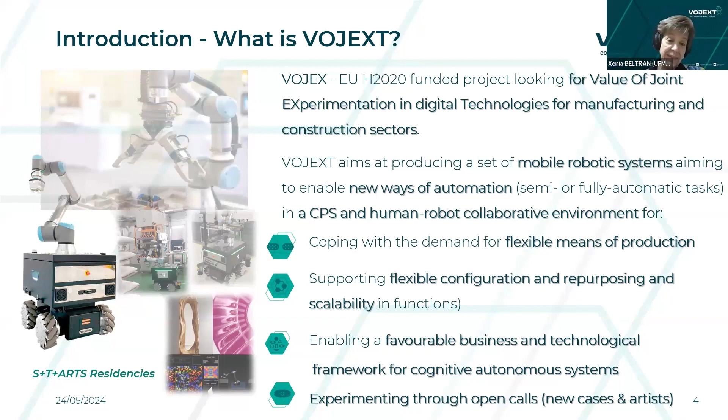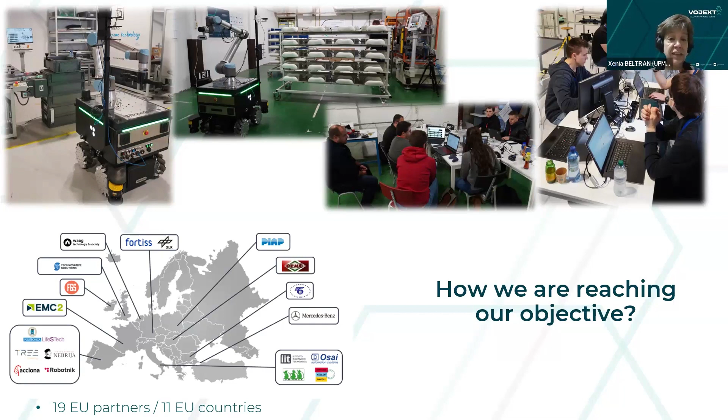From these companies we have worked together. We first studied the environments of the production, and we are working together as a team, as you can see, in the different shop floors, supporting how the robot can be integrated in the best manner for them. Next one, please.

The way we're validating all the technology we're producing - from the robot to the software through the visual components - for the different companies and organizations that are facilitating the demonstrators, is to have these 5 companies as our use cases. So we have 5 organizations of the consortium as our functional use cases, and we're working in their shop floors in the different areas. So we have one company from plastics in Hungary.

Actually, what they produce is polyurethane among some other products, but they have brought out the production of pillows and how to handle them. We have gone through challenges from this kind of sticky material to process and handle it, and to support not only how human errors can be overcome, but also how robots can collaborate with humans, because one issue they have is lack of personnel supporting their production.

The other use case we implemented is in the electronics domain, led by OSAI in Italy, an automation company. What we are doing is improving their current concept of robotics, going from fixed robotics to mobile robotics in collaborative environments, and applying it in electronics. They have different challenges, not only because their products are very small, but their idea is to have flexible means of production and see how the robot can be used in one or several machines.

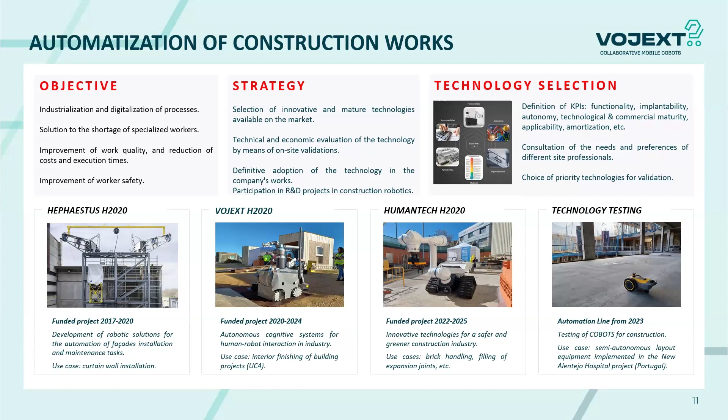We have also participated in other projects related to robotics for construction, like HEPHAESTUS, a system to install facades, and also VOJEXT, of course, and HUMANTECH with several functionalities. And the last one is one of the commercial items we are testing in our real construction sites.

Well, next please. What are the main interests of Acciona in this project, and specifically in use case 4? First of all, we think that we can take advantage through the project VOJEXT to introduce this robotic and digital technology in the works. In this way, we can optimize the quality, the cost, and the timing of these tasks, and introduce the industrial production concept in a difficult environment like a construction site.

With this, we also reduce risks and improve safety and health of the human workers, and combat a big problem with the lack of skilled workers for certain tasks. In this way, we also think that VOJEXT appeals to the new generation of workers who like to work with these advanced technologies.

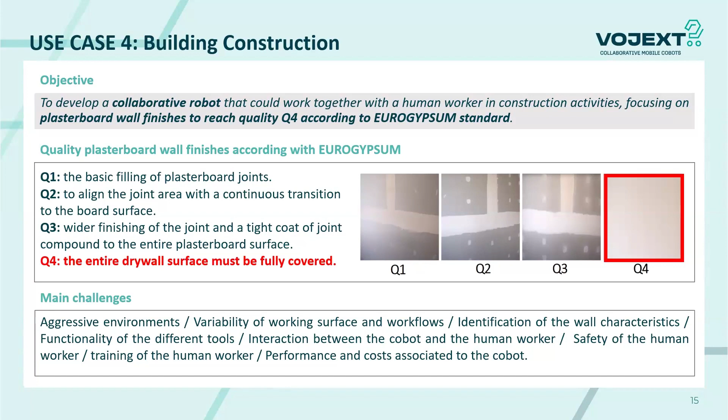Well, to do this, the workflow that will be followed in this use case consists of 3 steps. The first one is the taping of the joint between the plasterboard sheets. The second one, the spraying of the finishing paste on the wall, and the sanding of the plastered surface. With these 3 tools: the taping tool, the spraying tool, and the sanding tool.

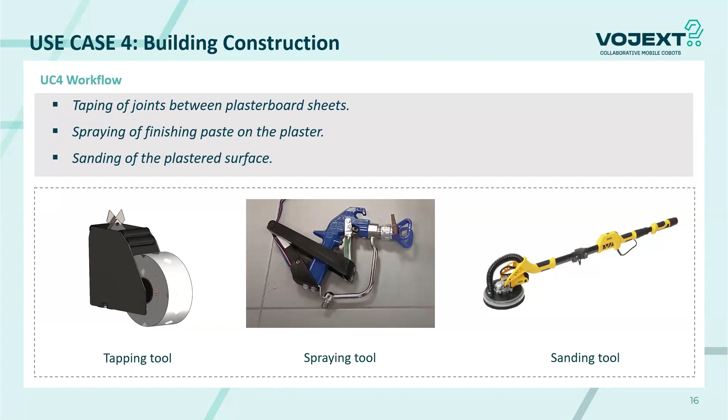Well, to carry out this use case, we have prepared 2 scenarios. The first one in Madrid, with the reproduction of a real construction environment with the construction of 2 walls with plasterboard sheets in one of our test fields close to Madrid. Here we did the first demo phase of the use case. That was a first confrontation of the robot with a simulated real environment.

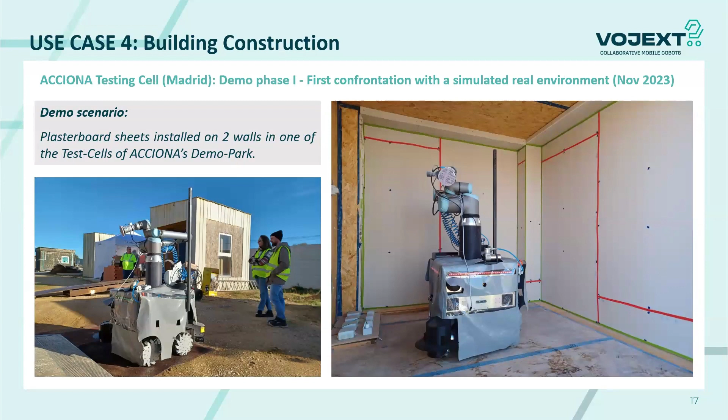Well, the second demonstration was carried out by Robotnik in Valencia, and in this demonstration we have done the second phase of this development, consisting of the refinement of the Cobot functionalities for use case 4. This activity was finished now in May of this year. In this case, Robotnik didn't use a test cell, but they reproduced two wall structures, simulating a corner in their facilities. Well, now we will see the demonstration, some videos and so on.

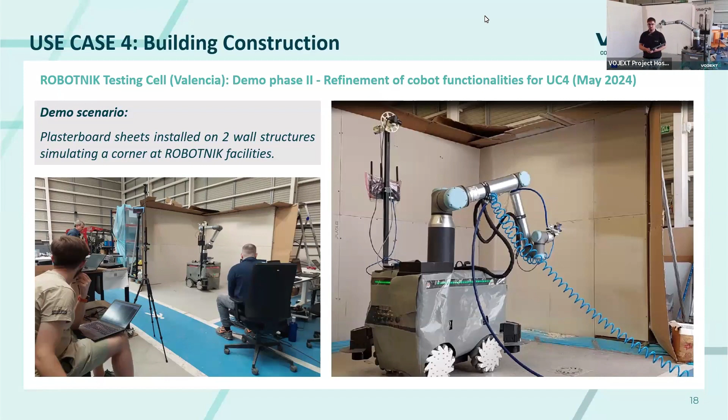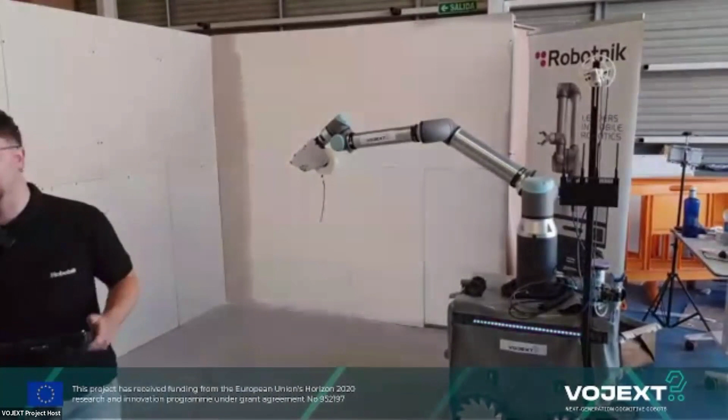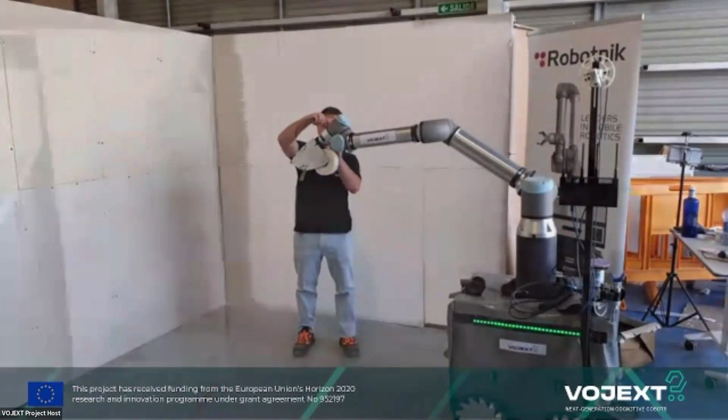Hello, welcome everybody to this demonstration of use case 4 in VOJEXT. In this case, we are going to show you the taping case. First, the robot right now is waiting for the validation of the tool changing. As we have different tools and different operations, we need a process in order to change the tool correctly and safely for the worker.

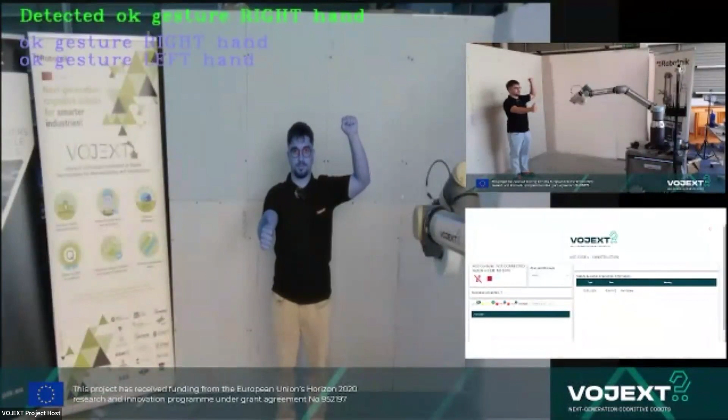Okay, once the tool is installed, you have to validate the process. And now the robot will move the arm to a safe position to start moving the arm to the home position.

It will move in front of the wall, as we detect with the camera, with the perception module, the joints that we have in the wall. It will localize in the map that we previously made and move in front of the joint. And then it will start to move the arm again to the start position of the taping.

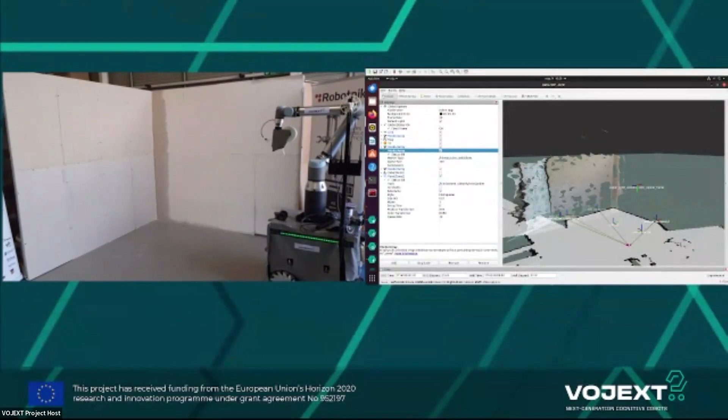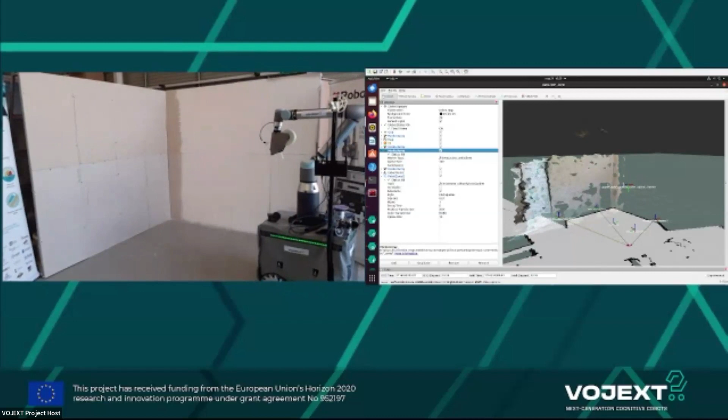Thanks to the lasers that the robot has installed, it knows where it is inside the map and will move to the position. Good.

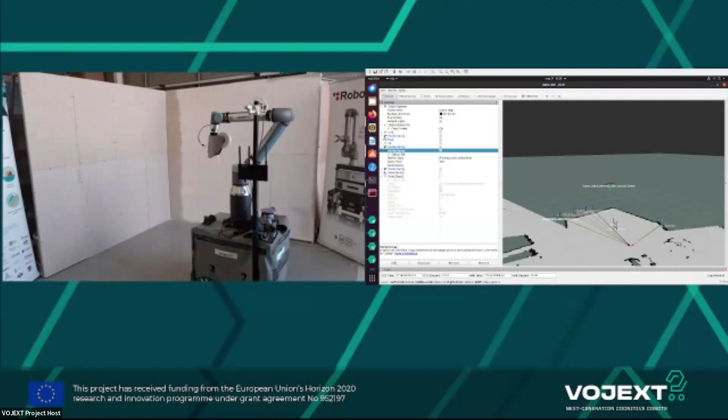Thanks to the lasers that the robot has installed, it's safe to be moving close to the robot, so I can attach correctly the cover that it has. And now the arm will start moving to the joint position where it will start taping.

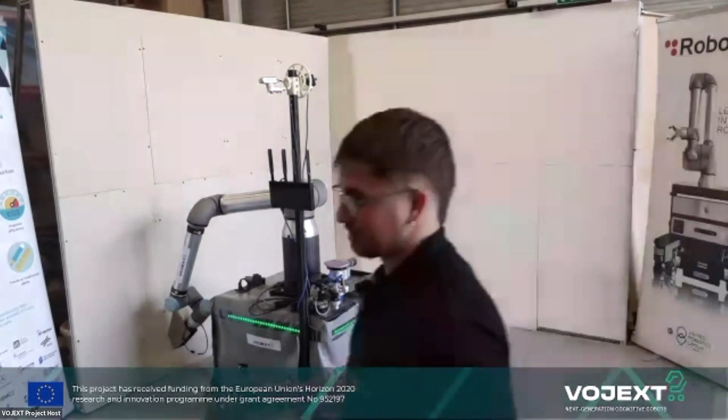Before the robot starts the movement of the arm, it's aligning to the wall to be correctly oriented. And now I have to start the process by checking that the tape is in the correct position, the tool, and prepare everything to start.

Right now I can see that the tape is fine, it's prepared. So I can validate the position and the robot will start moving.

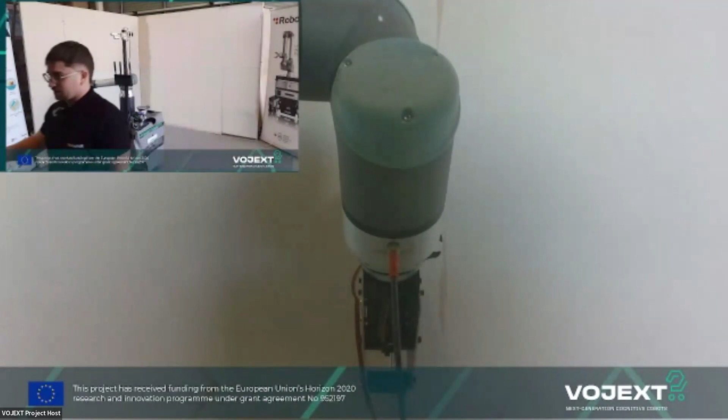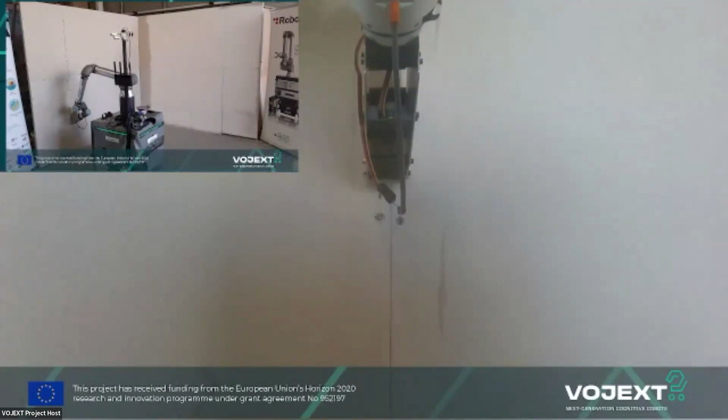First, the arm approaches the wall, and with the force detection that it has, we detect that the arm is touching the wall and start the movement of taping. It will go up following the joint that we detected previously with the perception module.

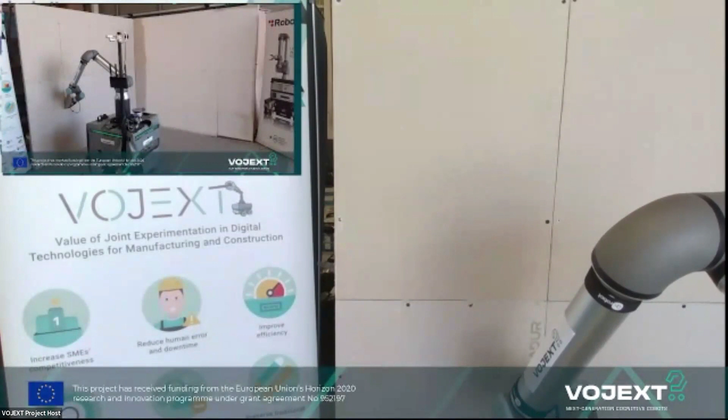Once the arm reaches the middle position, it will stretch the tape, as you will see soon. And then a cutter will be used to cut the tape.

Now, as before, the arm is moving to the wall, and once the force sensor detects that it's touching the wall, it stops and cuts the tape. Now we will finish the taping, moving slowly to attach it correctly.

Once the tape is correctly pasted on the wall, the arm will move to the previous position, to a home position where the movement of the base is safe for the operator, and it will move to the next joint. As before, the robot is aligning to the wall.

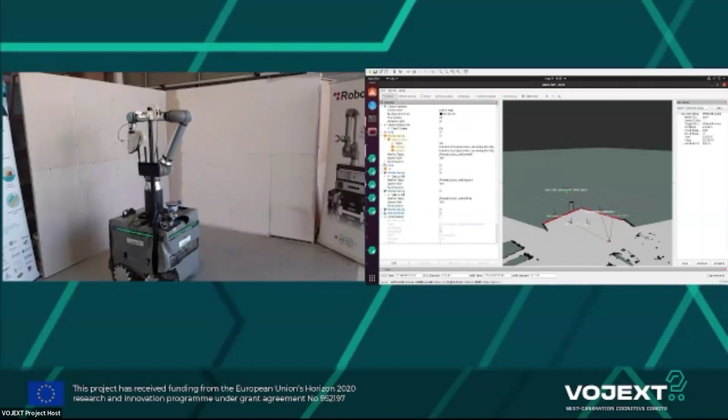So as you have seen, this is the process of the robot taping the wall. It will continue moving to the rest of the other joints. And now we will move to the next use case and show you the next robot.

Thank you very much. So indeed, this was the demonstration of our first use case. We will now move to the second part of the webinar, which is dedicated to the use case developed in Mercedes-Benz Turkey. You can see the technical team now because they are actually on site, and I will welcome Okan and Xenia from the Mercedes Turkey side.

Hello, Lucia. Yes, Xenia. Yes, give us a minute. Bilal is also connected from the Mercedes-Benz side, okay? And they're going to be presenting Mercedes in a minute. Let us just reconnect for a minute, and they'll put the cameras, and we'll be presenting in a minute. Yes, in any case, a short break was planned. So for the audience, if you want to grab a coffee, just a minute or two, and we will move to the next use case.

So for the audience, we were silent because we were having a break between the two use case presentations. As you can see, today we focused on a use case in construction presented by Acciona in the first part of the webinar. And we will now move to the second use case presented by Mercedes-Benz Turkey.

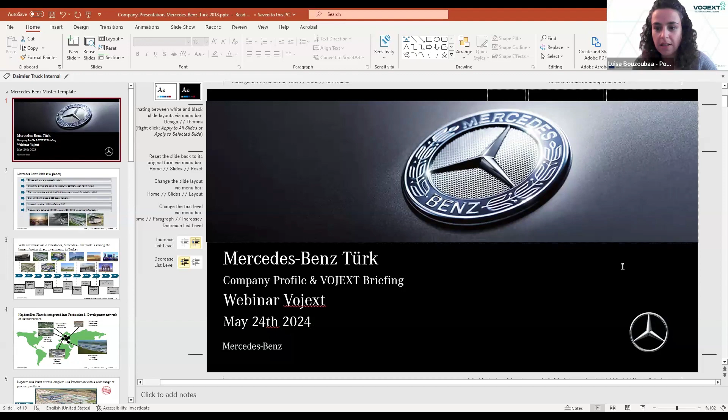I think we will start soon. I don't know, Okan. Yes, I'm on the line. I can start. Okay. So we will listen to you, Okan, to present your use case and your company before the demonstration of your use case. Let me share my screen, just a second. And hello to all again. I guess you can see the page, right? Yeah, it's not in full presentation mode. Now it's good. Okay. Hello all.

So this is Okan. We are two colleagues who are the persons in charge of EU projects. My colleague is Bilal; he will briefly introduce himself as well. My main scope is mechanical simulations and the general coordination of the projects. Today we are going to present to you what kind of scope we had at the beginning of VOJEXT, what kind of KPIs we had, and what we have received as the output at the moment. So let's share the information with you.

But beforehand, I would like to briefly introduce us; all of you probably know the meaning and the competence of Mercedes-Benz. We are one subsidiary of Mercedes-Benz in Turkey. Trucks and buses are being produced in Turkey, not just produced, but also developed geometrically, mechanically, and physically. All those tasks are managed and handled by Turkish engineers.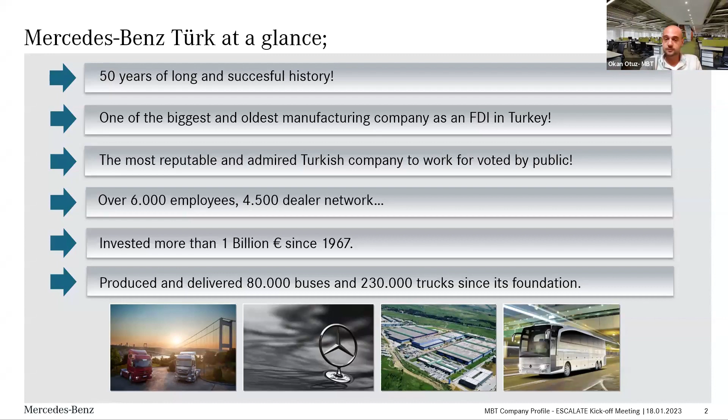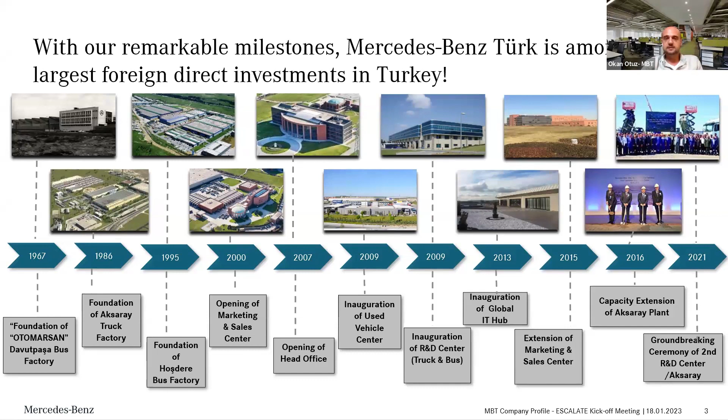This is somehow the workflow. So we have at the moment two R&D centers, one physical test facility, and one IT hub. All those hubs and offices are not just supporting the Turkish ecosystem, but also globally they have been supporting with their engineering expertise. We are dominant in the bus sector.

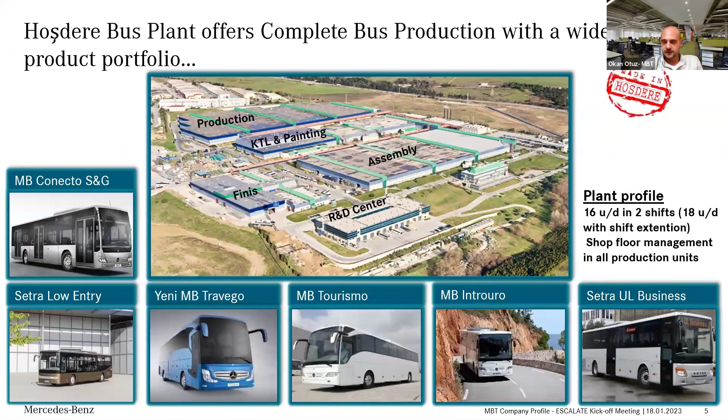We have a large bus portfolio, and for the truck sector we are also dominant in the sector and in the market. Mainly two truck types are being developed and produced: construction trucks and tractor trucks, which you can easily see anywhere in your country or other countries.

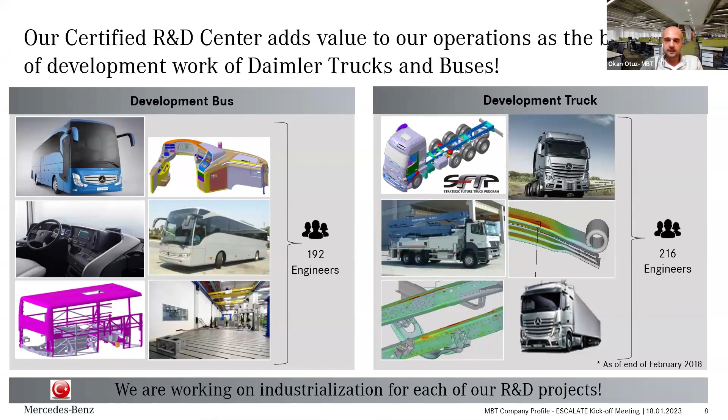Let's mention something about the development tasks for bus and for truck. All components, exterior, interior, load carrying, cosmetic, all those parts, from zero level to the final level, are controlled, managed, designed, assigned. They are all being designed in Turkey.

And also one strong property of ours, which we generally put into such EU projects, is the testing. So if any institutes, suppliers, or technology providers have an idea, we can easily embed it into or onto the vehicles, and let it be tested on the road under exact road conditions, so that all those technologies can see their qualities.

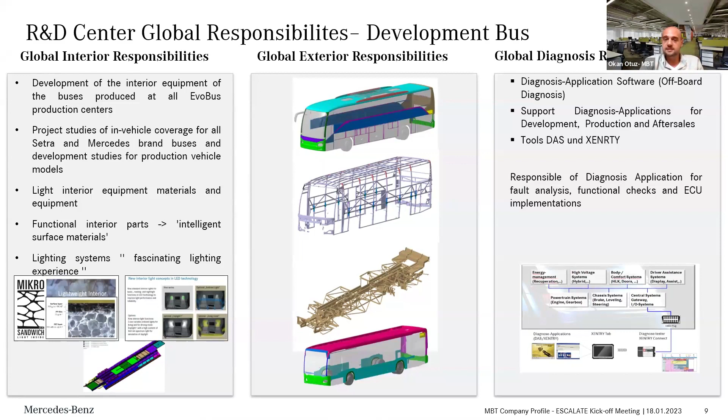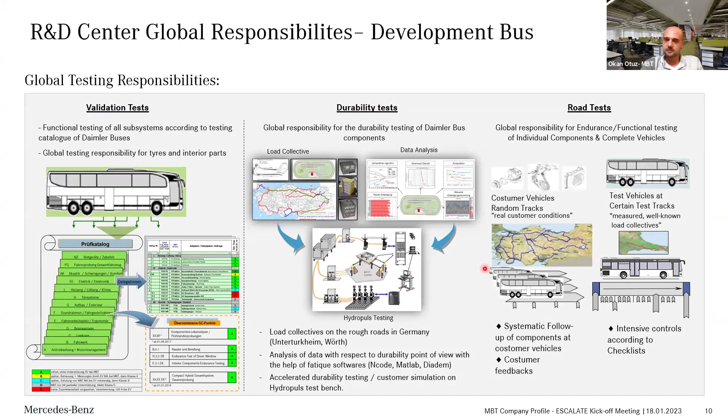Here you can see those test ways all around Turkey. On the right side you can see, just let me open the pointer. Yeah, all around Turkey and in Europe, in Germany, we have test roads, so we can collect data and comment on the results. Yes, this is some brief information about the company.

Let's switch to VOJEXT. So the main problem in the beginning was the anomalies and unexpected damages in the plastic components, fiber reinforced or non-fiber reinforced. So we thought about what to do and how to fix those problems. We need to dive into the mold and examine the mold, get something out as experience, and use it in a digital twin model.

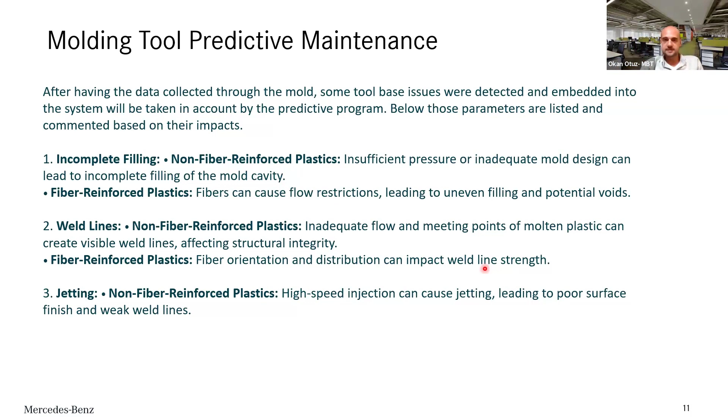Here you can see some problem statements: incomplete filling, weld lines, high-speed injection and therefore air traps, and for the fiber reinforced plastics, the tensor of the angle of the fibers, fiber orientations, fiber distribution, and any breakage, so we need to take it into account, and so on.

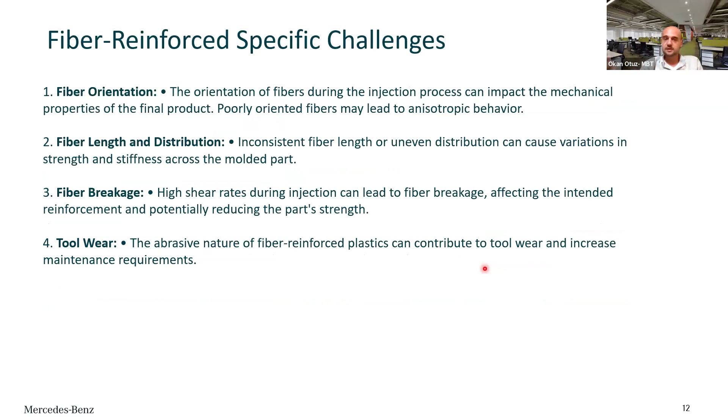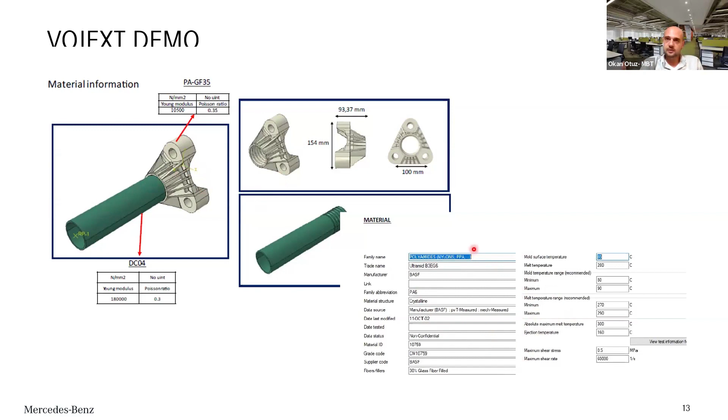So one by one, we have been collecting the production data to understand where the anomaly happens. Yes, some results. For example, weld lines, as I mentioned, at different locations of the part. This part is a bit complex, as you can see. There are many ribs on it, many radiuses, and inside we have friction welding or direct fixation in the mold of this part to that part.

Those weld lines not should but must be detected accurately in order to avoid unexpected brittle damage. These are all detected by using AI-based software. One algorithm was developed, the collected data was processed using this algorithm, and then this data was transferred into the digital twin model. I will show you later on.

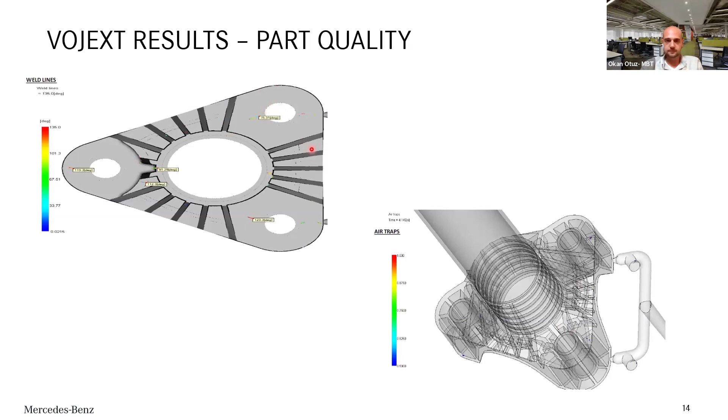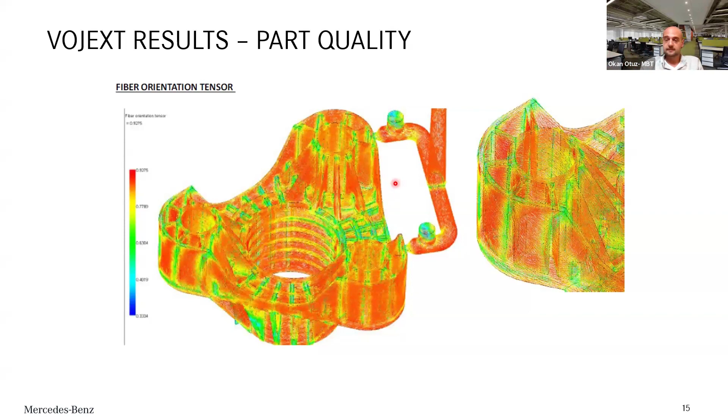Yes, some other weld line locations. Weld line means the gap. So this gap should be filled, or nevertheless, we need to put it into the model, then we can see the accurate stress and deformation results.

So what we will do and what we are doing now, we will get those mold data, not just from the virtual, but also from the sensors we put in the mold. We will get the data, examine it by using AI, and put it into the structural virtual twin model. So some mistakes, some errors, some failures can be detected through this new, novel method.

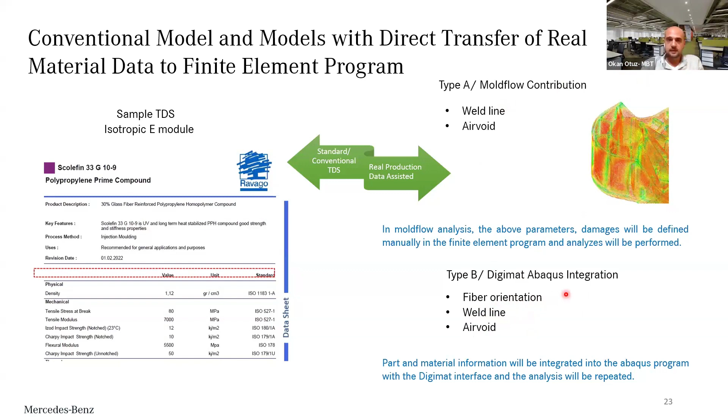So if we would not use the molding result and the VOJEXT output, the open call winner's solution, then we would generally say, okay, this part will not have any damage. But after putting this effect, this contribution, it is around 0.9. So it is about to exceed the limit. This is a very essential contribution to us.

Currently, we feel more insured and more in the conservative zone to catch the damages and not to have the damages on the customer, not just for tensile, but also bending. We have the difference we needed to find out previously. We can call it predictive maintenance. We are now predicting the damages and we maintain it.

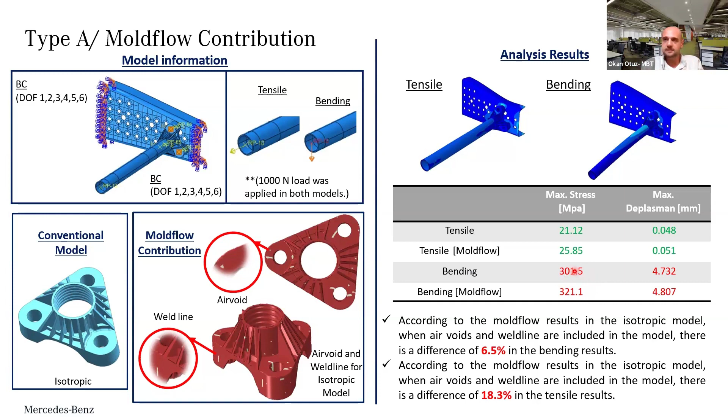This is the integration of the system. We have our sensor collected data. We find out the anomalies in the micromechanical structure. We put it into the stress strain diagram or FX diagram. Then we put it into the finite element software. At the end, you will get the results.

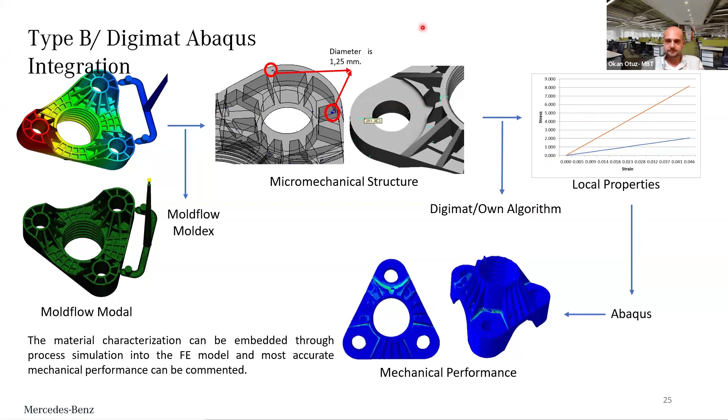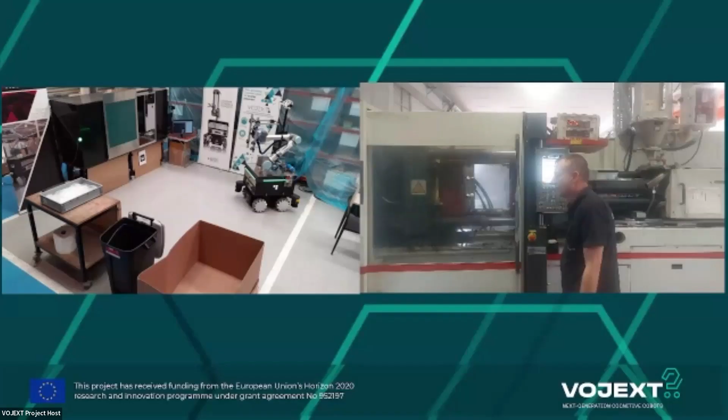Thank you, Okan. We will start to show the demonstration from Mercedes Benz. This is a demonstration done in parallel at Robotnik in Valencia and Mercedes Benz Turkey. Welcome everybody again. We are in the second demonstration now, in use case 3, and in a moment we are going to start the system.

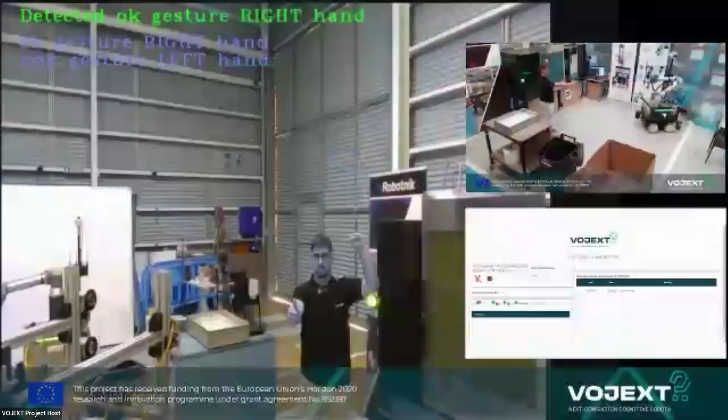First, the robot will pick a piece from the injection machine. Now it's waiting for my validation to start, and the process will start. As you can see, the mock-up of the injection machine starts working, heating the piece. Once it's finished, the door will open again and the robot will start moving. Now I have to announce that the machine has stopped working and the robot can start working.

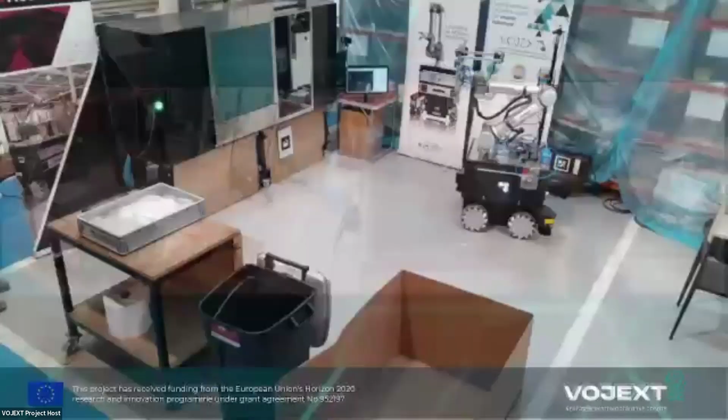Now the robot is localized inside the map that we previously made, and thanks to the laser, it is navigating in the map, moving in front of the machine, and aligning to a correct position. Thanks to the perception model that we have, the piece is detected in the machine, and the robot arm will start moving to the position in front of it.

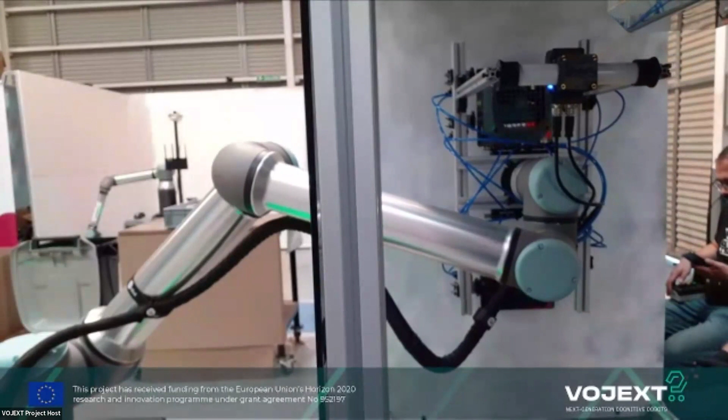Once the arm is positioned in front of the piece, it will approach it. And thanks to its force sensor, it will pick the piece with the pneumatic system of the gripper. As you can see, the robot has the piece, and now it will start moving to the inspection table, where it will be placed. I will check the results of the injection.

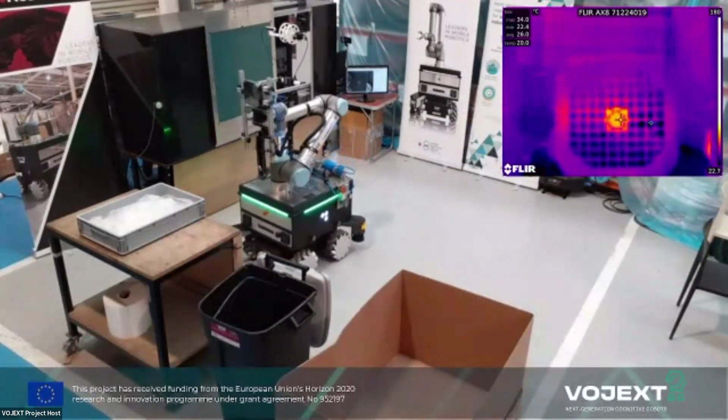Now the robot will move again to the initial position, waiting for my confirmation. So now I place the piece in the correct box, as it's an okay piece. And now it is waiting for my validation of the piece, the results of the piece. Now the process starts again. The operator has to pick the pieces.

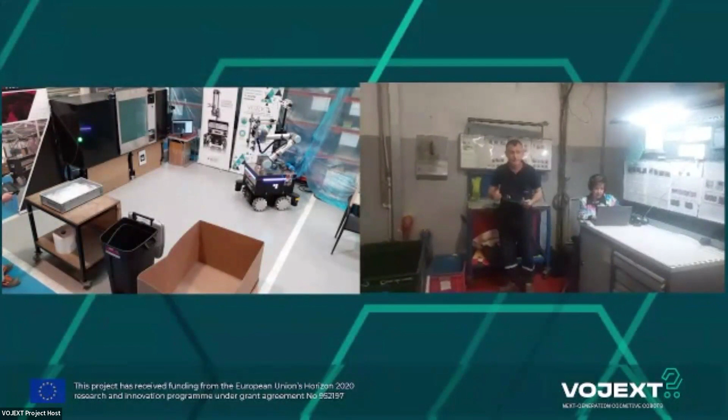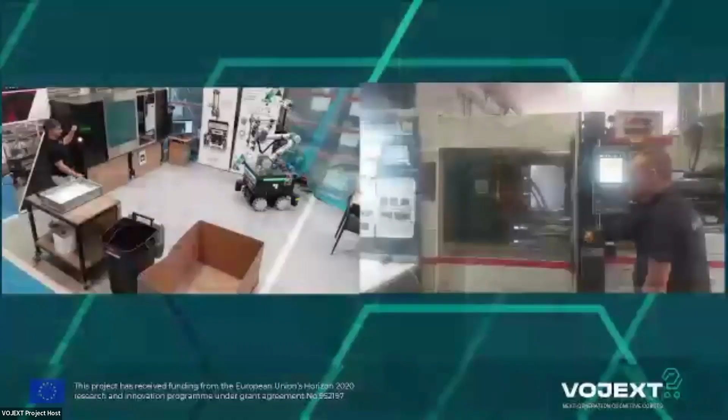I can see that the piece is okay. I will have to validate the piece to the robot and continue working in the process. This will be done repeatedly. Then the robot will start again the process of validation. So I pick the piece, validate it, and send the results to the robot.

And for the last time, I will pick the piece, validate it, share with the robot the results of the injection, and this time the robot will pick the piece. So again, the door is closing, starting the injection process.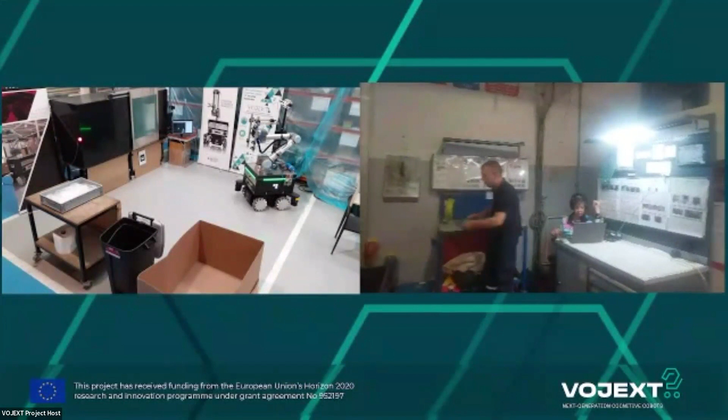After the process has finished, I validate to the robot, so we can start to move to the machine. As before, the robot is localized in the map, moving, navigating with the lasers that it has, and aligning to the machine.

At this point, the camera and the perception module is detecting the piece and sending the robot the coordinates where it is. So the arm moves in front of the machine, of the piece. Approaches to it, and once it detects the gripper is touching the piece,

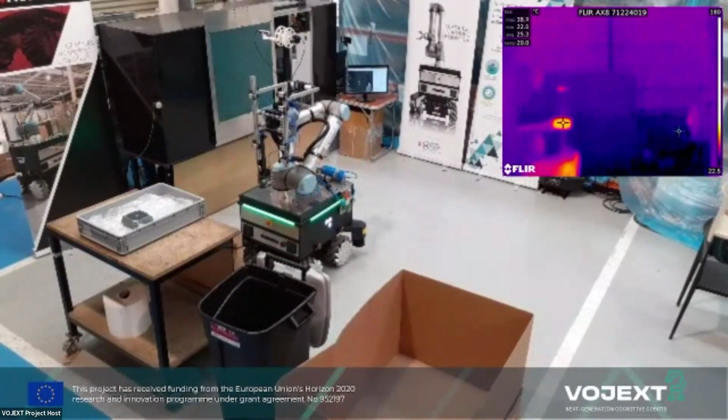the pneumatic system activates to pick the piece and return the arm to a home position where it's safe for the operator and for the robot to move. It will place the piece in the table where I will pick it to inspect. In the meantime, the robot will come back to the home position where it will be waiting for my validation.

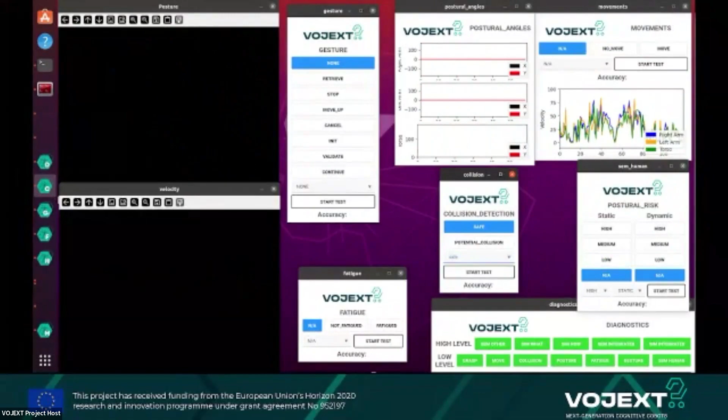So as you can see, this is the process, the workflow. The robot combines with the operator to do the visual inspection, and pick the pieces from the injection machine.

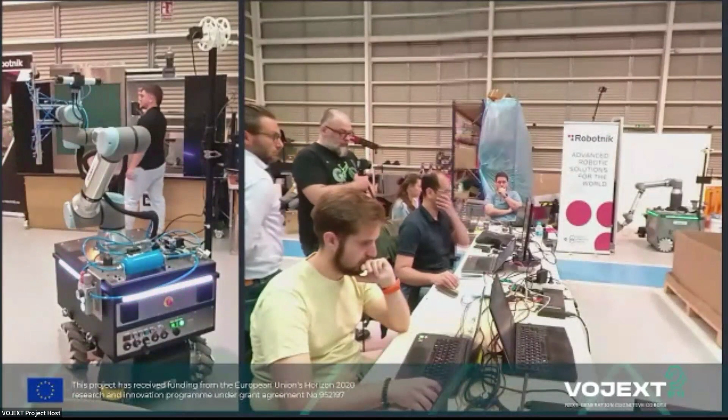Hello, Lisa, here from the shop floor. We are ready with the demonstration, and also from the lab we are ready with the demonstration. So Xenia, we saw now the different demonstrations and the different processes in the two use cases. I don't know if you want to add some elements before concluding. Just to remind the audience, if you have some questions, don't hesitate to add them in the chat. Currently, I don't see any. But Xenia, maybe you want to add some elements regarding the two demonstrations that we saw.

Sure, there is a little bit of noise here, so apologies. We are at the shop floor, just at the production installations. But yes, we would like to say that we are very happy with the demonstration. In both cases, it had been successful. The idea behind the construction environment was to get not only the taping, that is what we saw today, but also the painting, okay?

And also we are able to manage the robot in the different environments. We were able to start in Madrid, in Acciona, and to finish in the lab to extend the use case as such. So actually the results had been successful in this case. And with Mercedes Benz, as you said, we were able to connect remotely the machine at production stage here in Turkey, while we were managing the robot in Valencia at the lab station with a big mock-up and simulation